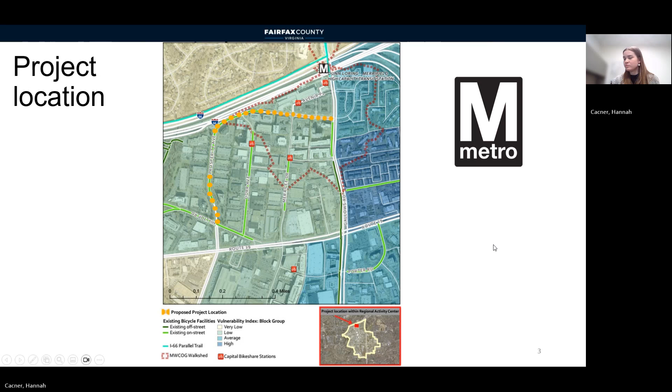In terms of what Prosperity Avenue looks like today, as I mentioned, there are buffered bike lanes that extend from Hilltop Road to Dorr Avenue that we implemented through a road diet in 2020. However, those bike lanes end at Dorr Avenue, and the segment near the metro retained those 4 lanes. So what we have near the metro is just a lot of space for vehicles, and all of that width in the roadway really encourages speeding among drivers.

With all the development here, there's a lot of demand for pedestrians crossing the street, but in the road's current configuration, it's pretty dangerous to do so. We also feel that bicycle demand is suppressed near the metro due to the lack of appropriate bicycle infrastructure there.

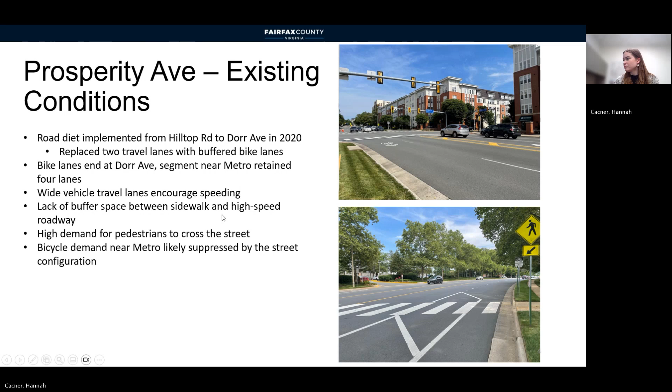Our consultant on this project did a crash analysis and found that there were 4 reported pedestrian crashes since 2019 on this segment of Prosperity Avenue. Based on the locations, it does look like almost all of them occurred within existing crosswalks. There have also been a number of vehicle crashes on this roadway since 2019.

In terms of safety issues, our department regularly receives requests for pedestrian safety improvements from people who live and work along this part of Prosperity Avenue. Most of those requests are related to excessive vehicle speeds, and failure on the part of drivers to yield to pedestrians in crosswalks, especially those crosswalks near the metro entrances.

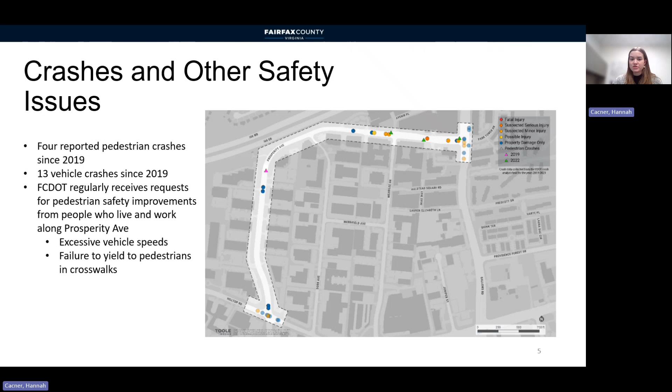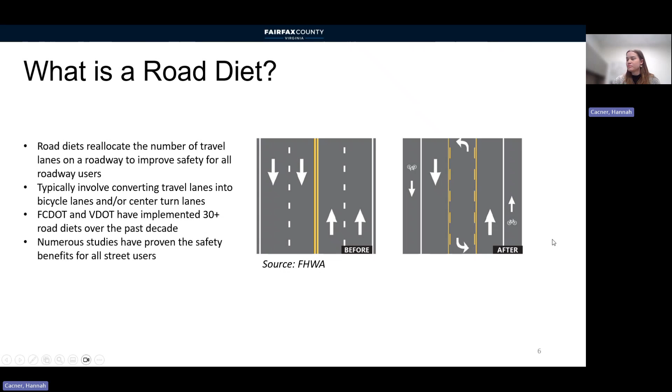Through this project, we're proposing a road diet along the 4-lane segment of Prosperity Avenue near the Dunn-Loring Metro Station. We're proposing removing 1 travel lane in each direction and then adding buffered bike lanes on either side of the road to create continuous buffered bike lanes from Hilltop Road to Gallows Road. We're also proposing to add protective barriers along this entire segment.

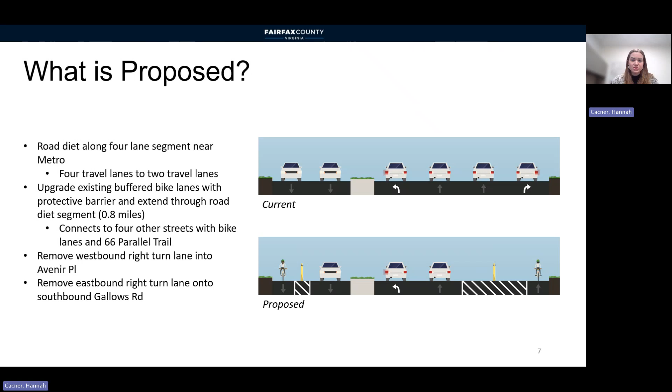This would create a bicycle connection to 4 other streets in the vicinity with bike lanes, as well as the 66 parallel trail. To accommodate those bike lanes, we are also proposing to remove a westbound right turn lane into Avenir Place and an eastbound right turn lane onto southbound Gallows Road.

In terms of outcomes for people who drive along this part of Prosperity Avenue, our consultant did a traffic study and measured the impacts on vehicle delay at the different intersections along this roadway segment, finding a 1.5-second increase in the AM and PM peak hours at the Merilee Drive intersection, and then a 7-second increase at the Gallows Road intersection during both those AM and PM peak hours.

These delays are well within the county comprehensive plan's permitted levels of delay for intersections and are also very unlikely to be especially noticeable by drivers.

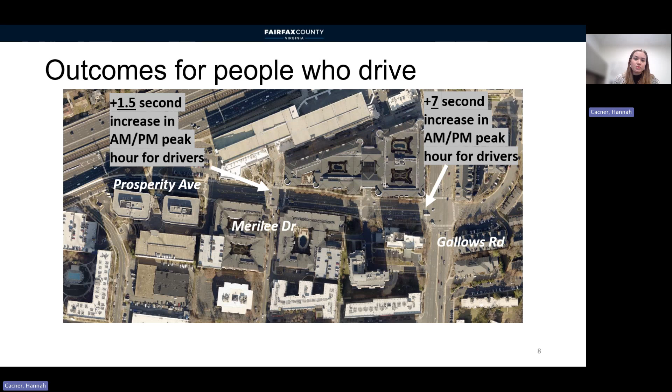There are some benefits for drivers associated with road diets. For one, it's easier and safer for drivers turning onto the road from side streets, just because there are fewer lanes to cross. The traffic calming effects that come from having fewer lanes provide more consistent traffic flow and less of that accordion-style slow-and-go traffic you sometimes see. Drivers will also see less racing between the two travel lanes.

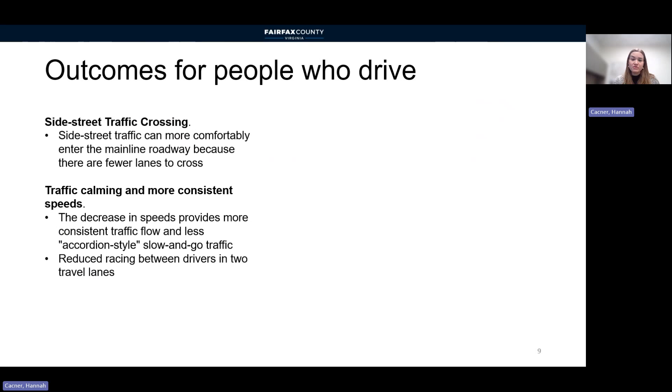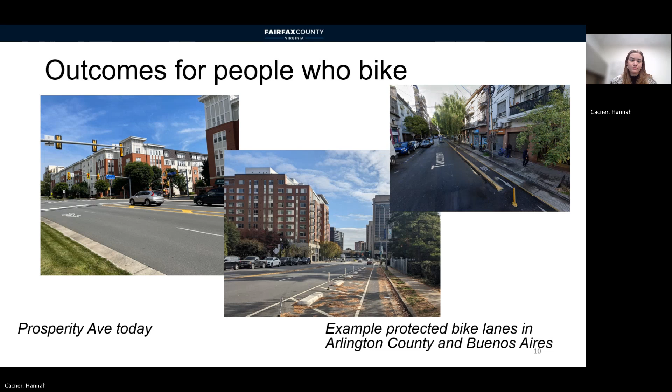People who walk in this area would also see very noticeable improvements with the proposed design. By adding buffer bike lanes, we would significantly decrease the number of conflict areas between pedestrians crossing and vehicles in the travel lanes. Right now, someone crossing has to wait for a gap in traffic across all 4 lanes. With the proposed design, that person would only need to cross 2 vehicle travel lanes and would have additional buffer space to wait for gaps in traffic. We're also proposing banning right turns on red at the signalized intersections to reduce conflicts between pedestrians and turning vehicles.

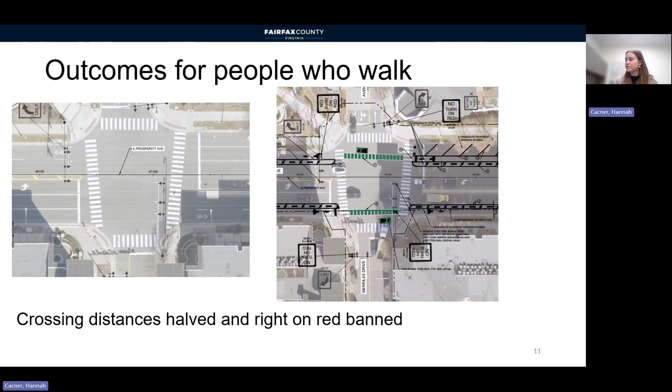We're also proposing adding 2 concrete refuge islands at 2 of the existing mid-block crosswalks closer to Hilltop Road to the south. The proposed design features a central refuge island and 2 smaller refuge islands in each bike lane buffer, similar to the example from DC.

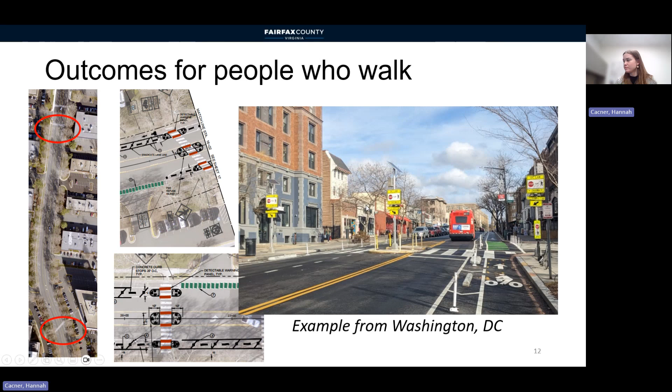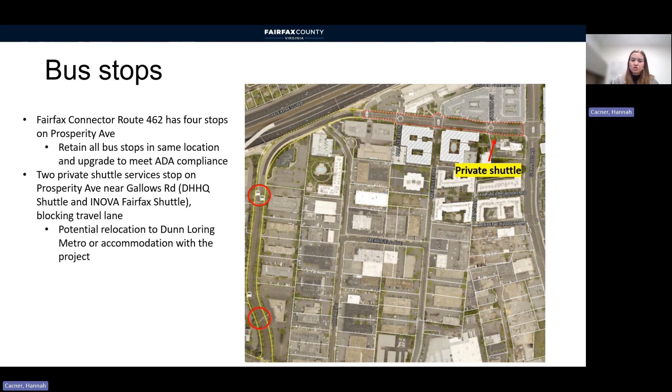I'd also like to note some potential impacts on the bus stops on this corridor. Route 462 of the Fairfax Connector has 4 stops along this segment of Prosperity Avenue, and we're proposing keeping those 4 bus stops in their current locations, but upgrading them to meet current ADA standards. There are also 2 private shuttle services with stops along Prosperity Avenue closer to the metro - a Defense Health headquarters shuttle and an INOVA Fairfax shuttle - that currently block one of the travel lanes where they stop over by Gallows Road. So we're looking at coordinating with WMATA to relocate those shuttle stops closer to the Dunn Loring Metro along with this project, which should be more convenient for their riders anyway.

For those 4 connector stops, we're looking into adding a bus pad similar to the one we currently have on our cycle track on Virginia Center Boulevard in Vienna.

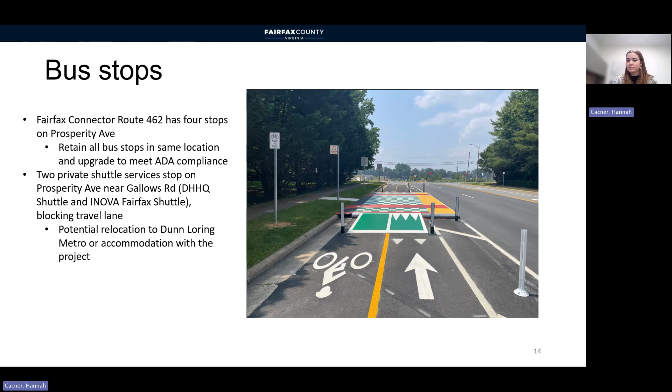Something else we're watching closely is the proposed redevelopment of 2750 Prosperity Avenue. A developer recently submitted a proposal to convert those older buildings in the area in red into 1,500 to about 1,800 residential units. Our comprehensive plan does allow for 1,900 units in this area. In their application, the developer proposed removing the buffers from existing bike lanes and also adding street parking, but we plan to work with the developer to keep those bike lane buffers there.

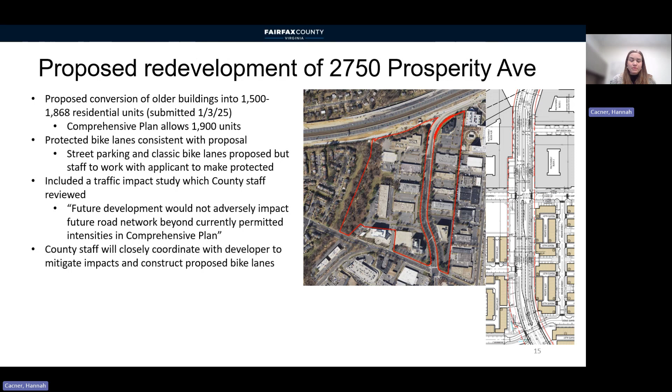The developer did include a traffic impact study, which we did a quick review of. In that study, it was stated that future development would not adversely impact the future road network beyond the currently permitted intensities in the comprehensive plan. But in the coming months, we will be thoroughly reviewing that traffic impact study for accuracy. As this moves along, we will continue to coordinate with the developer to mitigate any impacts to this project and construct the proposed bike lanes.

In terms of next steps, VDOT has reviewed the plans and provided us with feedback, but some elements may change as a result of any feedback we receive. Following our public meeting, we will collect, review, and listen to any feedback from the public. If this project is approved, FCDOT would be responsible for completing the design and identifying funding for construction.